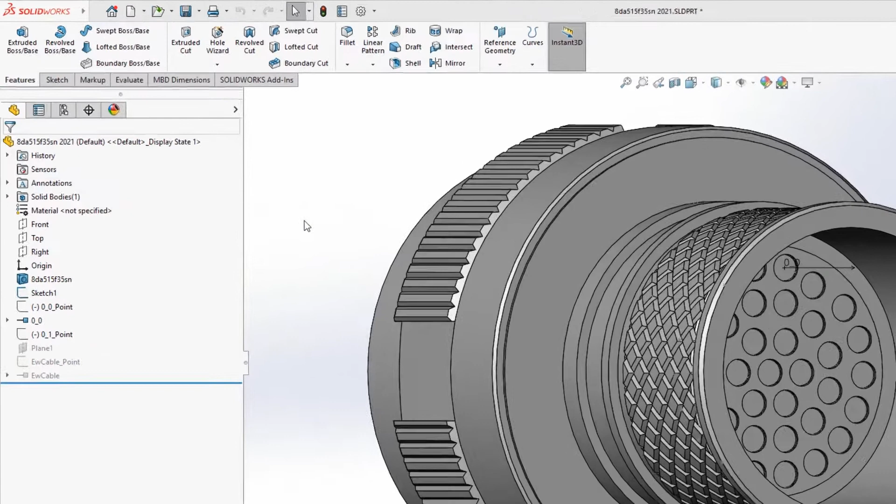Adding connection points in SOLIDWORKS became easier. They can be done inside SOLIDWORKS by going to Tools, SOLIDWORKS Electrical, where you can select Create CPoint from Manufacturer Part. In this dialog, it remembers the last manufacturer part that was used, or you can browse and select a different manufacturer part from an extensive library.

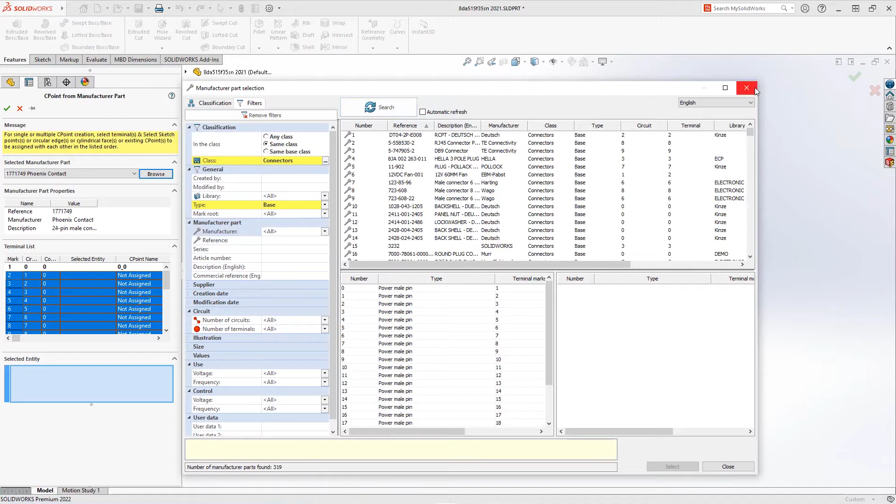The terminal list shows the list of connection points that need to be added. Selecting a point or an edge in SOLIDWORKS updates the table, and selecting OK will add these terminals to the part.

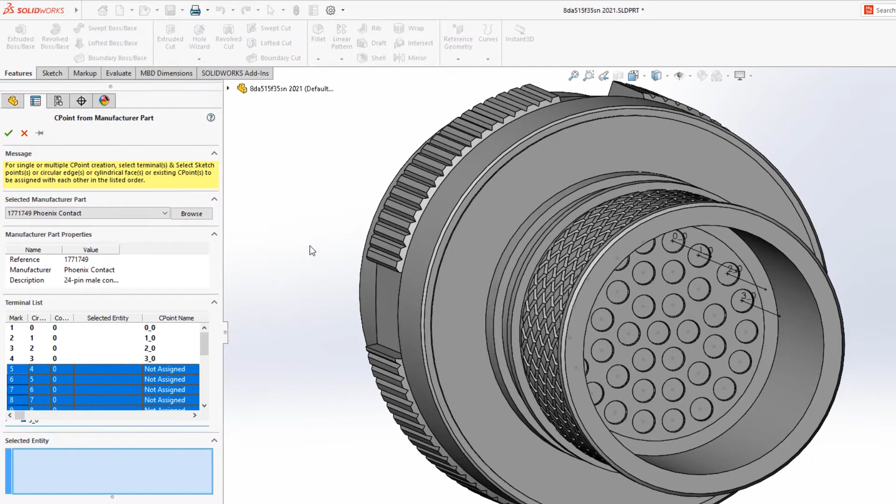Going back to Tools, SOLIDWORKS Electrical, Create CPoint from Manufacturer Part reveals what terminals already have been placed with the remaining list to do. The ability to select the point or an edge in SOLIDWORKS, to add the connection point with table updates, allows you to quickly create electrical components right in SOLIDWORKS. Less time creating parts and more time designing.

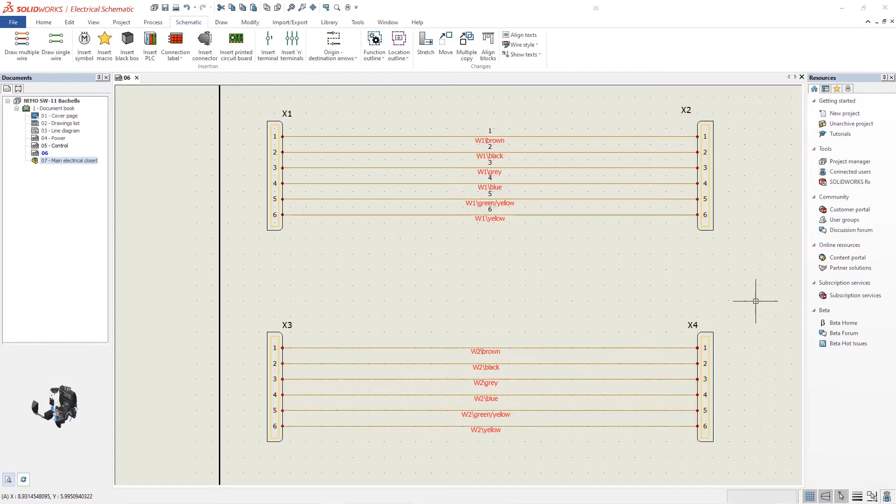How would you protect the junction between contacts and wires to eliminate electrical failures? Backshells are used, and SOLIDWORKS now supports them. Two harnesses from the battery to the control panel and external plug are created in SOLIDWORKS Electrical Schematic. In SOLIDWORKS, these two harnesses are routed. Now that the routes are in place, you can address the wires and contact protection.

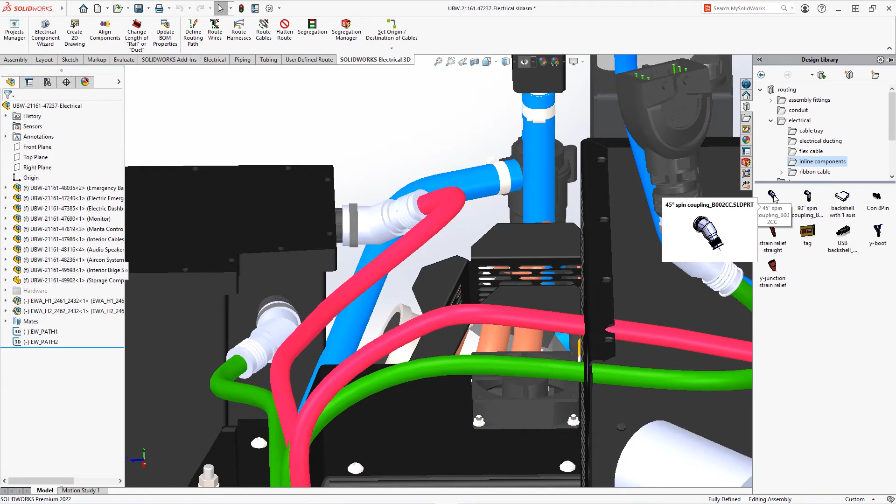Adding backshells to the connectors removes the stress between contacts and wires. Backshells are available in Design Library, Routing, Electrical, Inline Components. A 45-degree spin coupling was used and mated to the connectors. One more connector with a backshell will need an adjustment of the harness to go through the backshell.

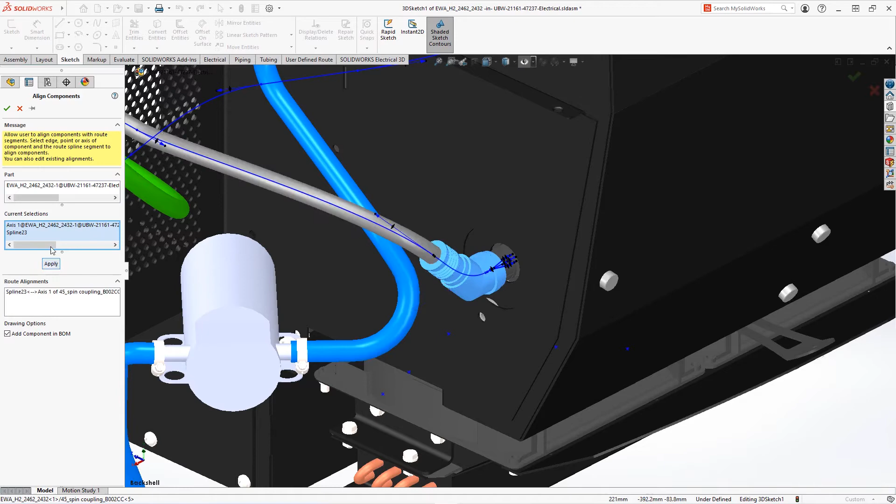Edit the harness that is in red and select the body of the backshell. From the right mouse button, choose Edit Route Alignment. Select the spline of the harness and then the axis of the backshell. Efficient use of backshells during design will protect the junction between contacts and wires, eliminating downstream manufacturing delays and costly redesigns.

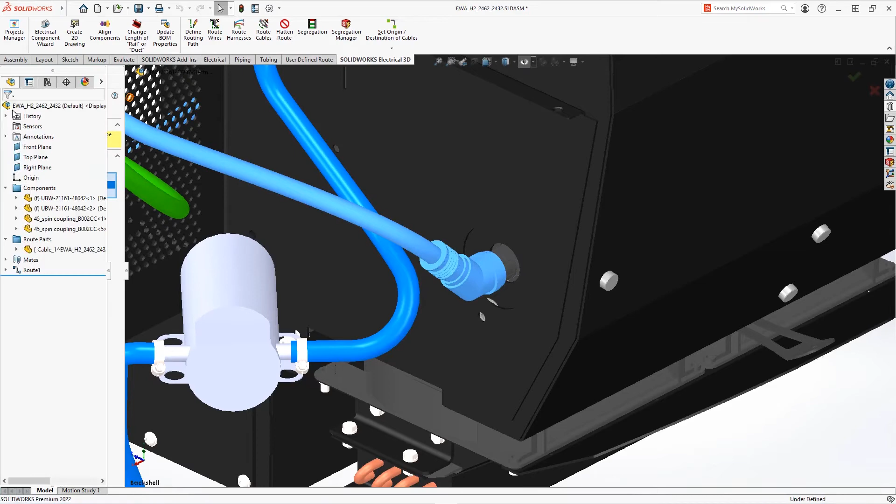Creating harness drawings and tables manually takes time and can be error-prone. Flatten Route in SOLIDWORKS automates this process and now supports backshells. Flattening this blue harness will include backshells along with the harness and connectors in its 3D position, and will show them in appropriate locations. In the Flatten Route dialog, choose what detail of documentation you will need to include, like manufacturer, display 3D connectors, and checkmark for drawing options.

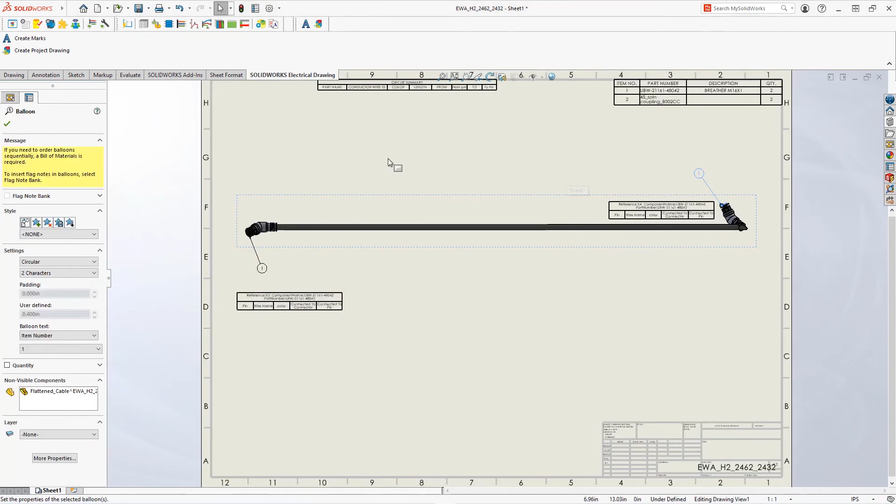Choosing OK does produce the harness drawing with connectors, backshells, tables, and callouts automatically, and saves time for engineers to tackle other technical challenges. The SOLIDWORKS ecosystem lets you quickly create electrical information for components, add and manipulate backshells for contact and wire protection, and create flattened harness drawings that include backshells.